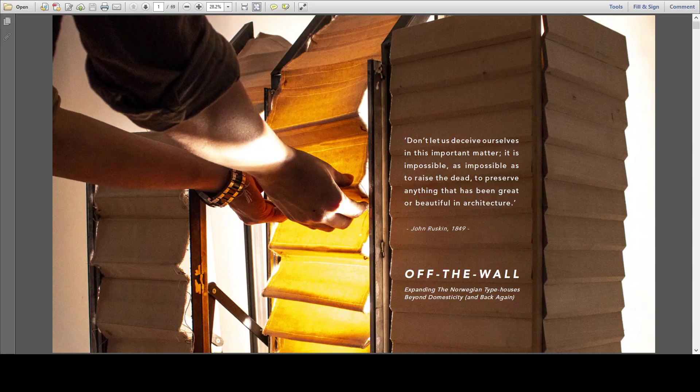I would like to start with a quote from John Ruskin: it is impossible to preserve anything that has been great or beautiful in architecture.

This project is about a wall, expanding Norwegian type houses in the UNESCO Heritage Site area and back again, thereby creating a flexible space to accommodate economic and domestic needs.

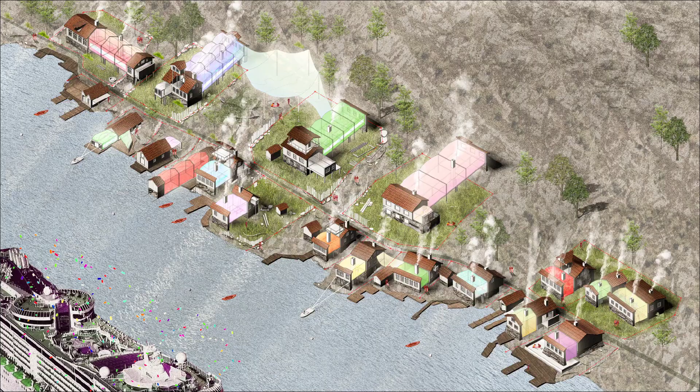I embarked on a journey along the North Sea, an area historically connected by trading routes, to find four buildings to survey, one in East England and three on the southern coast of Norway.

From Oslo, I drove 8 hours to Loshavn, the only place connected to the peninsula, and slowly made my way back to Merdo and Lyngør. Both islands are car-free and can only be accessed by a 15 minute boat drive.

These three areas in Norway are among another 20 constellation of islands that are currently serving as a local summer destination and applying to be a UNESCO heritage site.

For the demographic, in Loshavn there are 30 people living year round, but the population rises to 1,000 in summer months, with another increase of 10,000 people coming from cruise ships once the UNESCO heritage site is approved. This would make an unprecedented swelling, more than any of these islands could take.

They are being imposed upon by the macro UNESCO criteria, and the project lies in the problem of conservation and the potential for economic expansion from the exploding tourism.

In a way, UNESCO is trying to capitalize on backwardness as a resource, which brings me to question the ethicality of it. Could one modernizing nation pay another nation not to change?

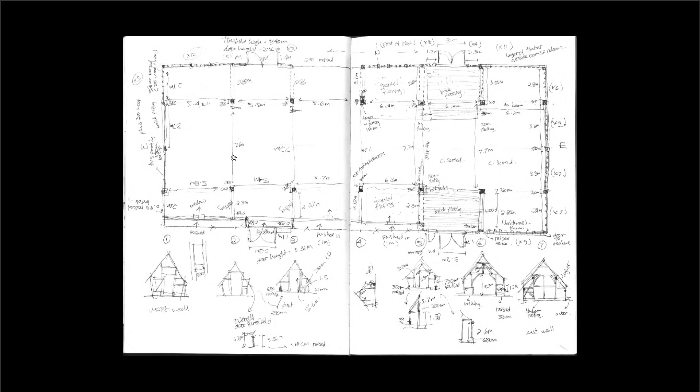From my journey, I gathered samples in the form of data as a series of survey drawings, as an attempt to study the existing old buildings in the affected area.

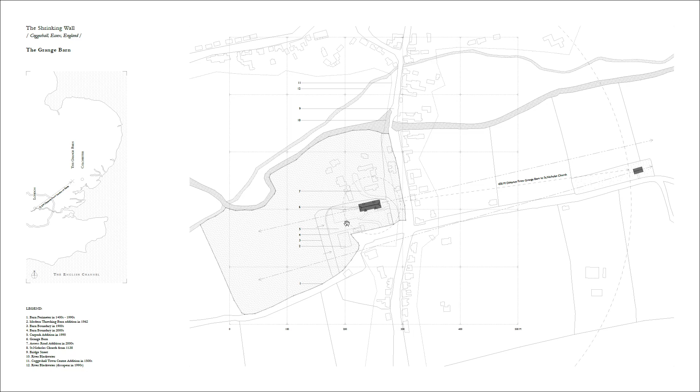I took a train to the town of Coggeshall to see the oldest barn in England, which I read about in Nikolaus Pevsner's book. This barn was an extension of the Coggeshall Abbey from the 12th century.

It was built on a slope. Thus, to save the overall building from rotting, the front wall was pushed back to make way for digging a gutter. In Norway, I found three Norwegian type houses from the 18th century in which residents are living year round.

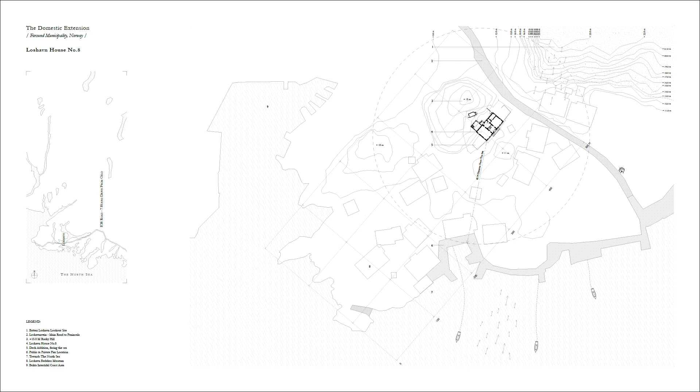I tried to understand what makes living suitable inside today. A house in Loshavn, attached to the peninsula, with the road connected directly to Oslo, facing the North Sea.

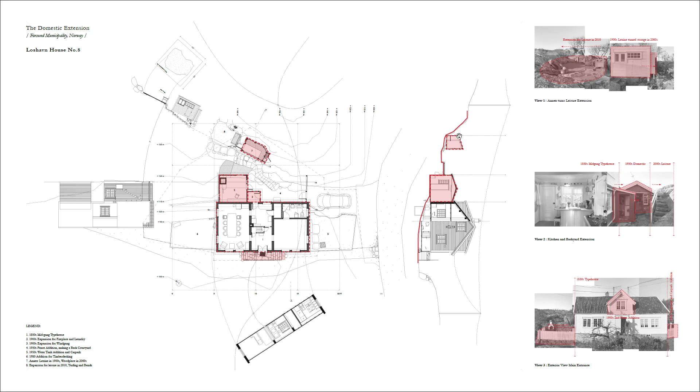It's an 1850s notch-lock timber construction type house in which, over generations, the owners kept adding rooms to support their domesticity. He added a laundry room in the 19th century, a threshold in the 20th century, and because it is located in a hilly area, he couldn't extend horizontally anymore, so he placed an annex on top of the rocky hill.

Merdo has a population of 1, and I surveyed the house of the only person living on the island. It's strategically placed near the museum and the public pier, the only public pier used to access the island. The owner seized the opportunity to expand the house commercially.

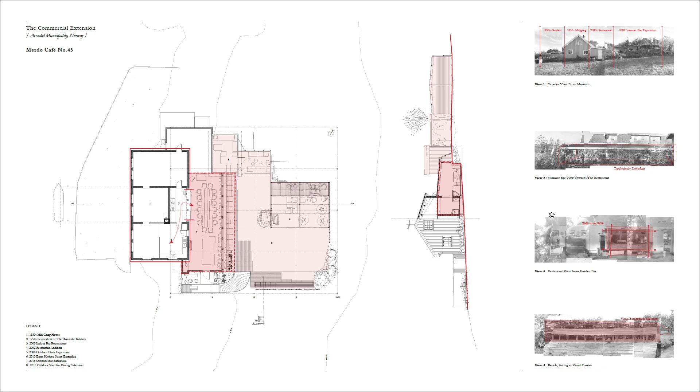So he cut off part of the wall of his 18th century notch-lock type house and added a restaurant of timber frame construction, a typological extension by subtraction, thereby connecting his domestic kitchen to serve the restaurant. He further added a timber decking in the 20th century to serve as a summer bar.

Lastly, in Lyngør, I found a house directly beside the water. This is a sailor's house, and there are rows of sailor houses in Lyngør with their own piers, so these sailors can dock their own boat directly at their house.

It is also an 1850s four-room type house with notched timber construction, and just like any other houses there, the owner flattened the ground to make a garden and terrace. This is the house of Miss Ellingsen, which I will get back to later.

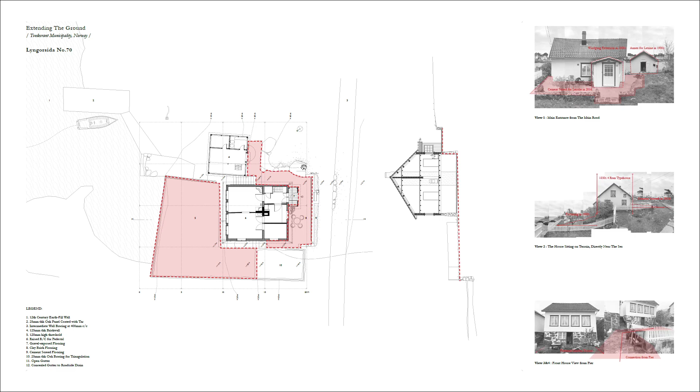When I laid out the survey drawings of these four old buildings, I realized that the walls have been moved throughout time. From shrinking, adding, cutting, and flattening, I concluded that the flexibility of a building's outer perimeter is somehow proportional to the amount of time a building could stand.

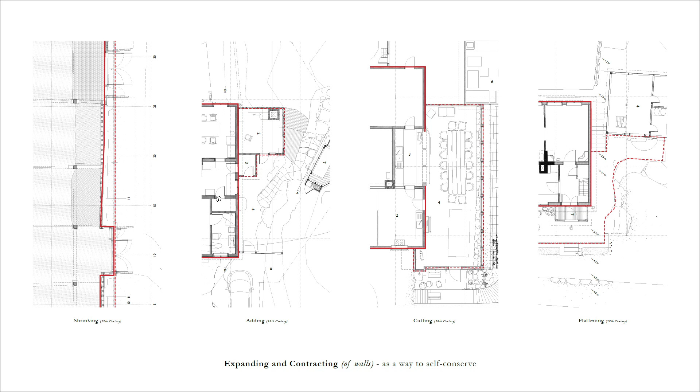Abstracted the idea of expanding and contracting of a wall to make a series of artifacts, to extend space and possibly lifespan.

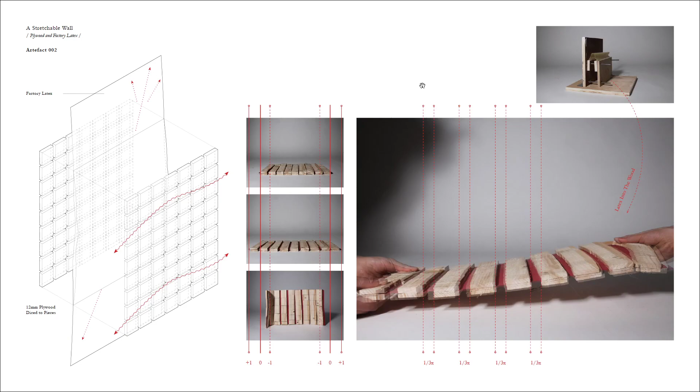I started with a very mundane sliding wall panel with a latex membrane to create an immediate volume of space that is also retractable. Then I inserted the latex in the wood and started to cut the panels into smaller pieces. I proceeded to cast my own latex module but shifted my thinking into a more environmentally friendly and local material.

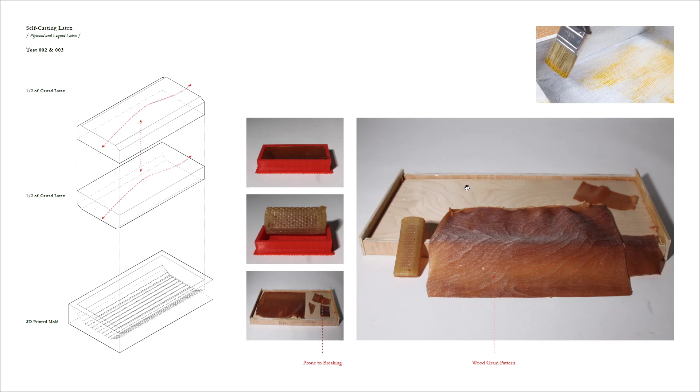But I still play with the concept of flexibility on cutting, this time with elastic rope, so you can add modules to extend the length.

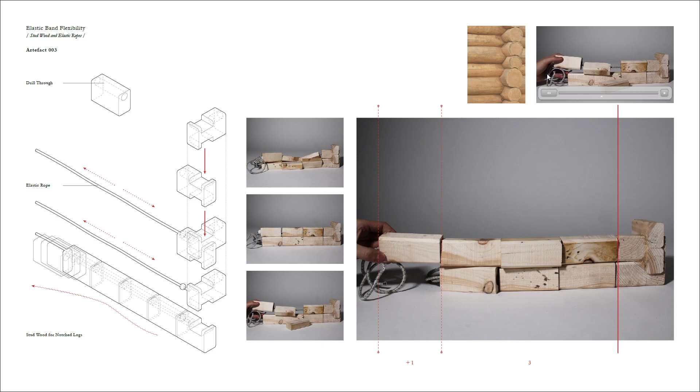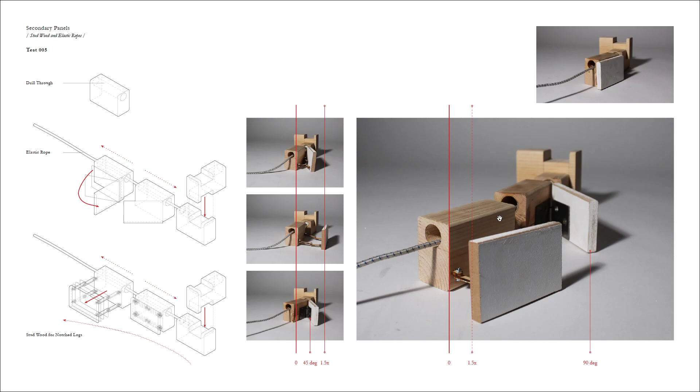And I realized that the long notch timber structure can be cut into smaller modules. I also played with the secondary paneling, addressing the issue of different axial movement, an attempt to create enclosure from a series of stacking.

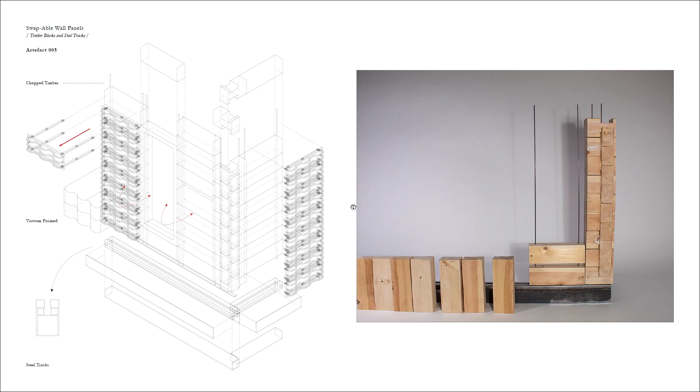I added tracks and started to see the elongated notched log as more of a modular construction material. Thereby, it is possible to add on or swap the different types of wall modules, varying the overall height, from solid wall to wall with opening and paneling and vertical stackings of wall modules.

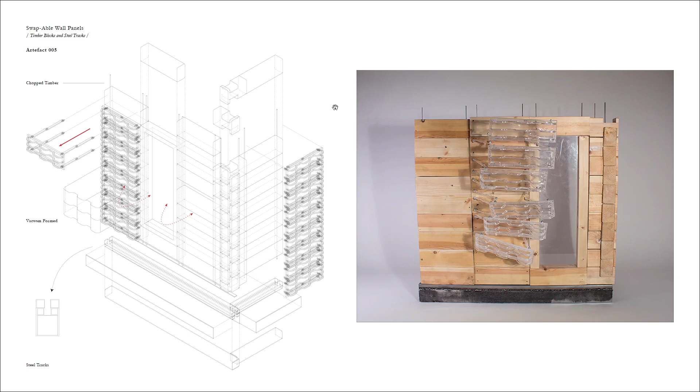This latest artifact just before the school closed was an integration of sailcloth as part of the wall construction. After talking to the local sailmaker, I found out that Norwegians have a long historic hobby of sailing.

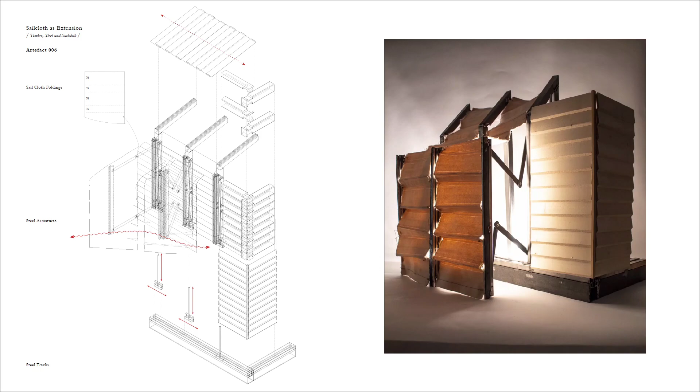But they can only use their sailcloth for 3 months before it's deemed unsuitable for the sea, while the metals were too imposing. There is lightness and transparency from the irregularity of the sailcloth, coming from the acknowledgement of paneling patterns of the timber wall construction next to it.

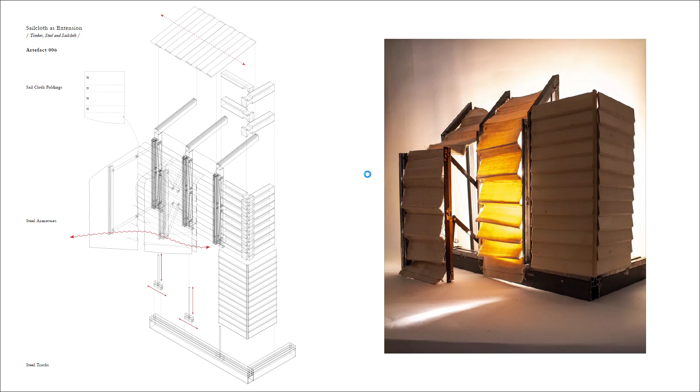From elasticity to flexibility to modularity and finally substituting with local materials. After a series of tests, I realized that the only way to extend these type houses is by cutting them and only leaving the essential structural elements.

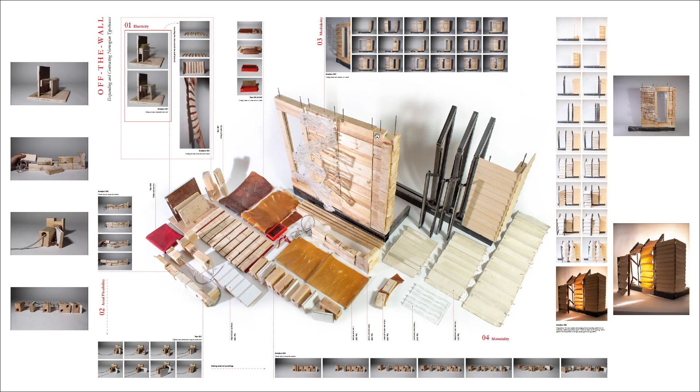In the case of log houses, it's the notch on the edges. To address the issue of conservation and the inevitable economic expansion, I propose a blunt move of cutting off the facade and dealing with the fact that it would actually collapse.

Martha Clark had been cutting houses since the 1970s, and it is possible to cut a straight line from the roof down to the foundation. I tried to challenge the attractiveness of the soon-to-be UNESCO heritage site with the already existing pulley and track system on the island that the locals used to pull their boats out from the water.

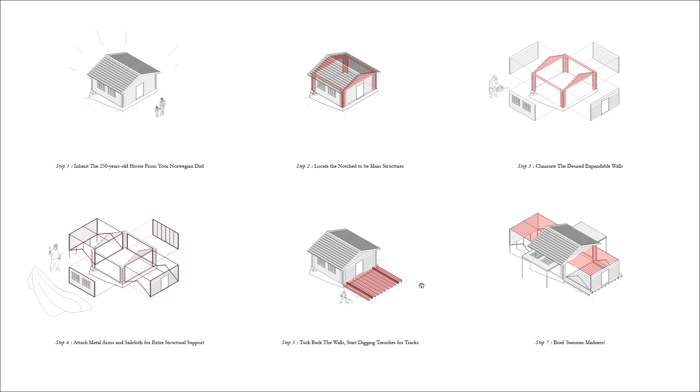Lastly, they put tracks and timber decks on the ground to their desired extension direction before they can pull out their walls in that brief summer period, a brief summer madness.

There are roughly 44 different permutations of the traditional Norwegian type houses, which follow the same logic of stacking logs around a fireplace in the center.

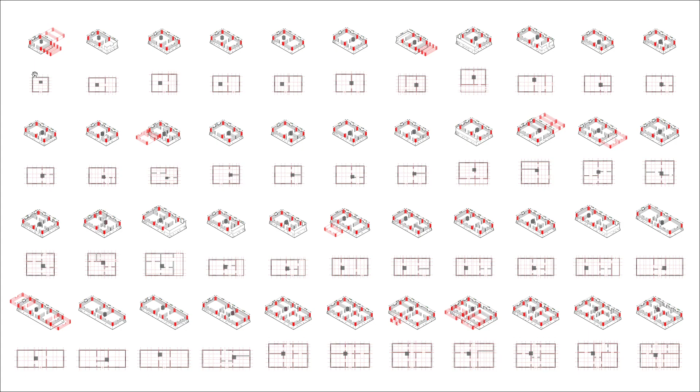I drew up grids, projecting from windows and doors as the pattern for expansion, to prove that the same cutting patterns can be applied to all of them.

Let's get back to Lyngør.

There is currently one public pier to dock the tourist boat during the holiday season, but along the edge of the island, there are a series of sailor houses with their own pier.

So when the 10,000 tourists dock from their cruise ship to the mainland and rent small ferries to Lyngør, these piers would potentially serve as a docking port.

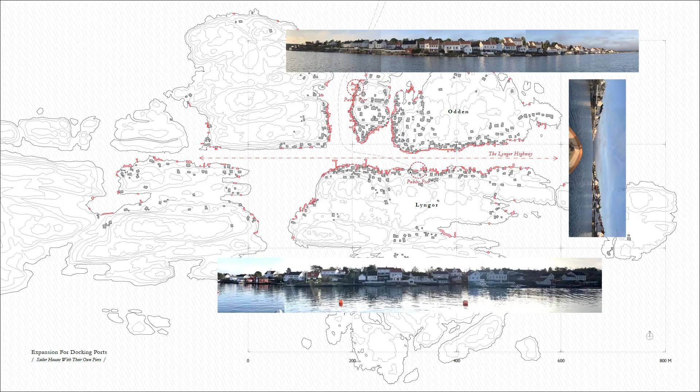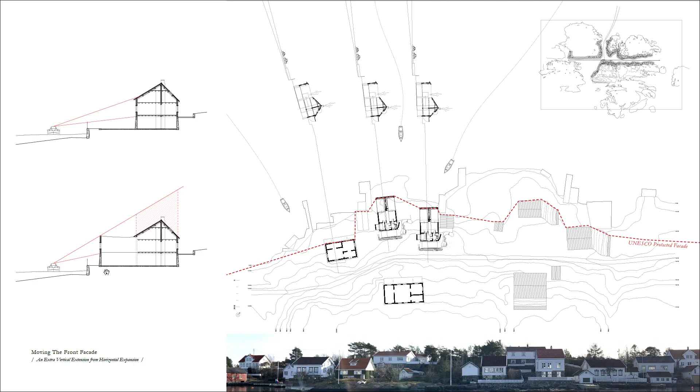I checked the UNESCO application guideline and realized that the protected parts are just the front facades, as they are trying to preserve the Nordic look in the elevation. With the increase in number of tourists, the house will be able to expand by extending the front walls, and by moving walls horizontally, it creates a parallax blind spot as a room to extend vertically as well.

Fire, all the way back to the primitive hut, was a central element in the living space, and in order to extend the house, I need to bring some fire along.

I looked into Miss Ellingsen's chimney, and I realized that, just like any other Norwegian chimney, its section was crooked. I saw an opportunity of cutting the fireplace and moving it together with the wall, and by moving the fireplace, I was able to change the whole ecology of the interior, much more than just in terms of how the house is heated.

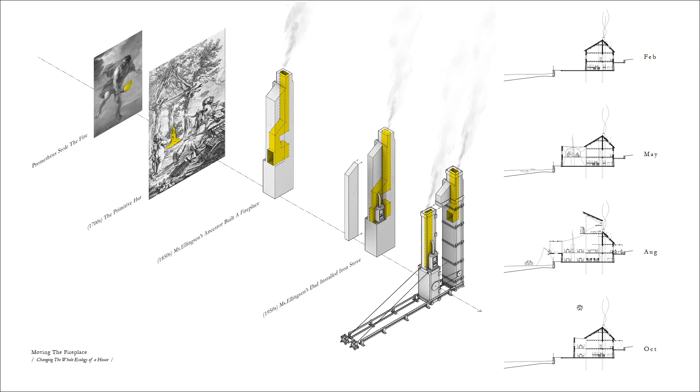From the cold Norwegian winter in February, to sauna in May, to full expansion in July and August during the holiday season, and slowly pulling back in September ready for the incoming winter. Extending the wall while moving the centrality of the fireplace gives the building a new life.

This is the house of Miss Ellingsen that I had surveyed. When summer comes, she would ask help from her neighbor to pull out the house, expanding the second floor horizontally, moving the fireplace out for the summer nights, and lifting the panels to get the cross ventilation of the summer breeze.

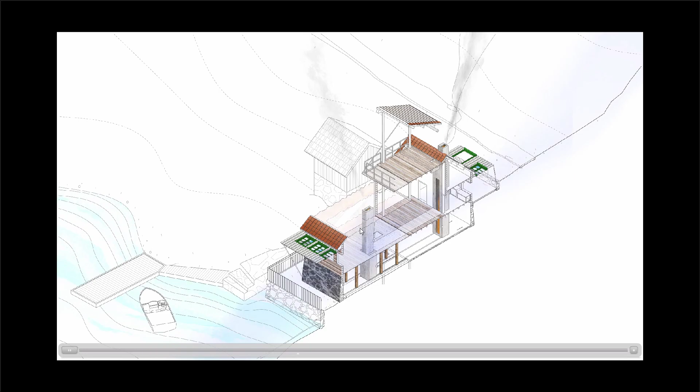The transparency of sailcloth admits light during the day and lights up the Nordic village at night from the house interior, signaling to the neighbors that they are present.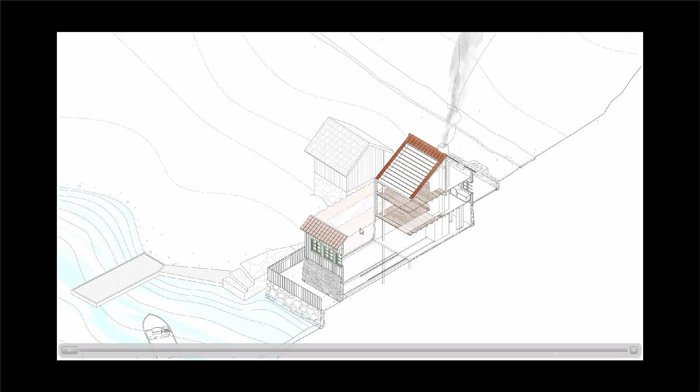And most importantly, these alterations are reversible and ready to be tucked back in during the Nordic winter, according to the UNESCO Heritage Guide. This will be the only way for the local community to benefit from the exploding tourism in the summer, while still abiding by the UNESCO guideline.

Once the overall structure of the notch-lock wall is seen as more of a timber frame structure, the owner can basically cut elements of their house, reinforce them, and make these elements movable and reversible. This way of cutting allows locals to escape the planning restrictions that are going to be imposed.

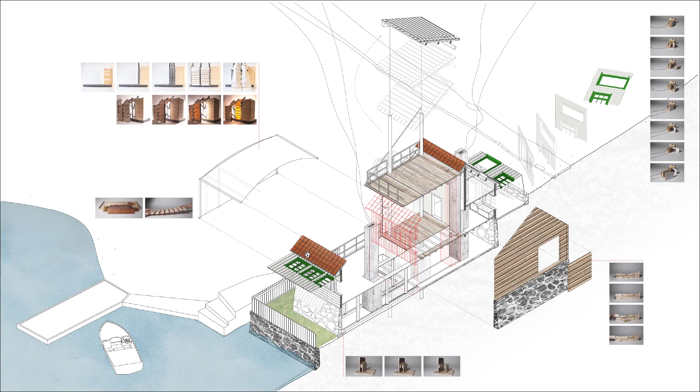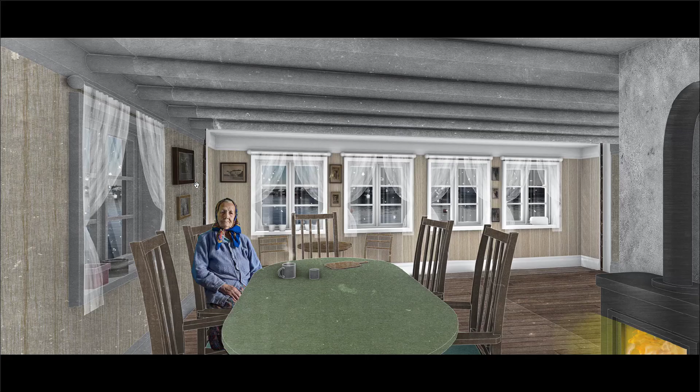From the survey drawings and photographs that I got from Miss Ellingson's house, I tried to recreate her house interior and imagine how it would look when it's extended. During the winter, she would enjoy a warm tea in her living room by the fireplace.

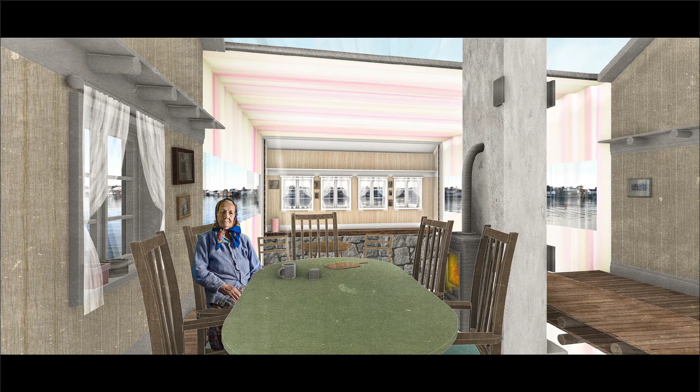Then the summer begins. She would have the front walls pulled out with a careful slit-off opening from sailcloth, only unveiling the horizon where the water meets the neighboring island. Lifting the second floor, then she would recenter the fireplace and put on the additional floors.

Now she can cook lobster for the incoming tourists and look straight into the bleeding jaw of capitalism and say, 'Yes, Daddy, please.' So when tourists dock at the port, her house would extend and accommodate as a restaurant with all the cooking served from her domestic kitchen.

From surveying a series of old buildings along the North Sea to starting to cut the very mundane elements that define enclosure, it brings me to the final part, which is the injection of this micro-physical idea into the molar and macro-political fabric of the UNESCO Heritage Protected Area.

Houses near water would capitalize on the opportunity to be a sauna in the winter, while houses more inland would probably just expand to cater more accommodations or possibly restaurants.

While Norwegians traditionally mark their house boundary with stones and fences, there's a possibility of compromise between two or three neighbors to create a more collective surface, thereby changing the overall social landscape and attitude of the village.

Just imagine the screeching metallic sound of the whole village in that brief summer when people pull out their front walls. Tension from sailcloth which clashes with the old wood and stones, aged, made soft by the sea salt, chopping off the whole wall and bringing violence to these poor houses.

It's like what Winston said: it's like breaking someone's leg and finding beauty in it. Thank you.